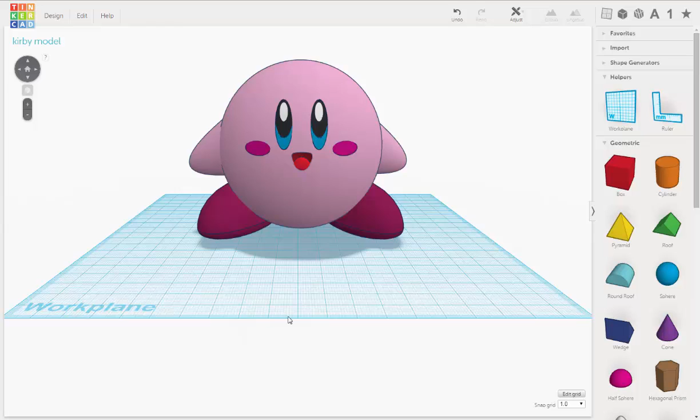Okay, so the first thing is, just by looking at him, we go to the corner here and we can see how big he is. He's basically 82 by 82, so 82 millimeters. So he's on the big side for a 3D printed model.

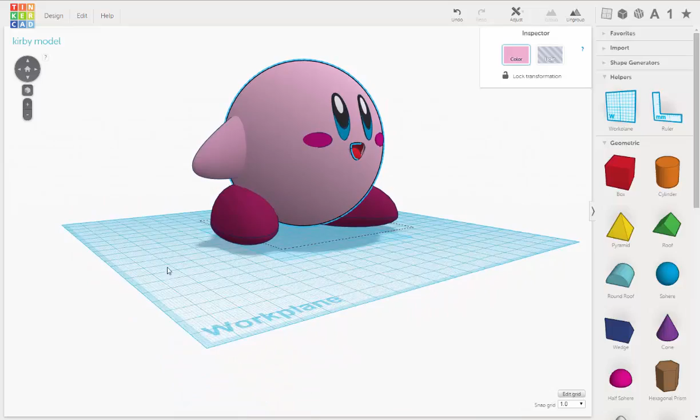On top of that, right now he is essentially solid, not hollow. One of the things I do to keep the cost of making these models and characters down is you hollow them out so that you don't have to pay for all that material, and that can really bring the cost down.

Another thing you can do is shrink him down to a smaller size, which can also have a big effect — again, less material.

One of the things you should do first is set up an account at shapeways.com, which is really easy and completely free. If you're on the younger side, you need to ask your parents, but again, it's completely free.

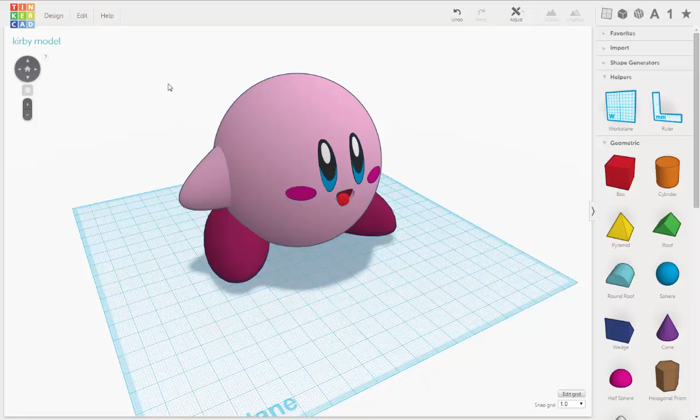So we go up to Design, go down to Order a 3D Print. Just click on that — it's super easy. This pops up, and here are 4 different 3D printing services.

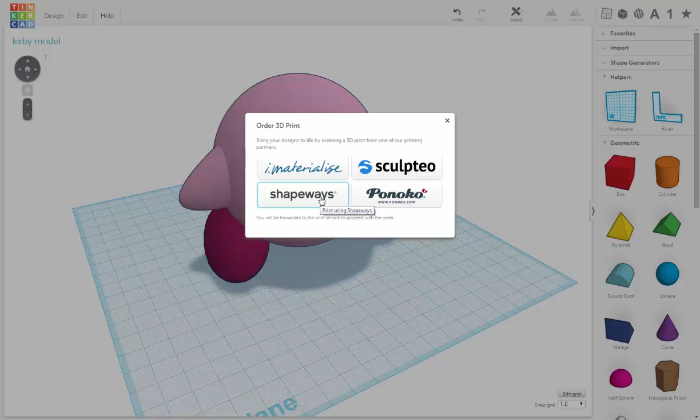I've used Shapeways and Sculpteo, and they're both very good. Shapeways tends to have a bigger selection with metals, but since we don't have to worry about that, we're just going to be printing a color character. I haven't tried i.materialise or Ponoko, so anyway, click on Shapeways.

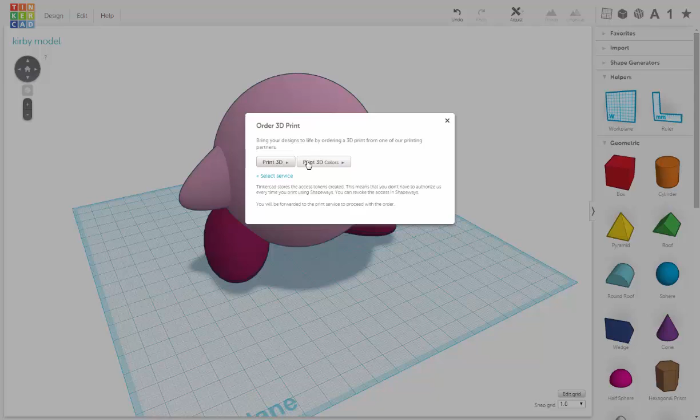Here it says Order 3D Print. If you're printing something you want to paint yourself, you just click Print 3D, and they would print it in a white material — or you could pick a different color material. But he has color, so we want his color to come through, so we click on Print 3D Colors.

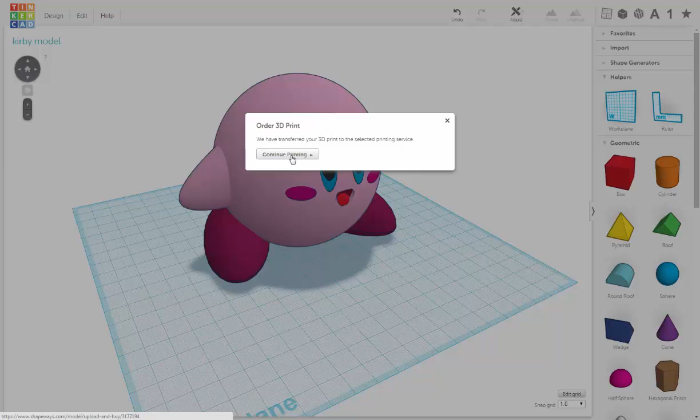So they've transferred it, now we want to continue to print. If you're all logged in and signed in, if you click this, it'll probably ask for your username and password to log you in, and it'll remember that, which is very convenient. I've already done that.

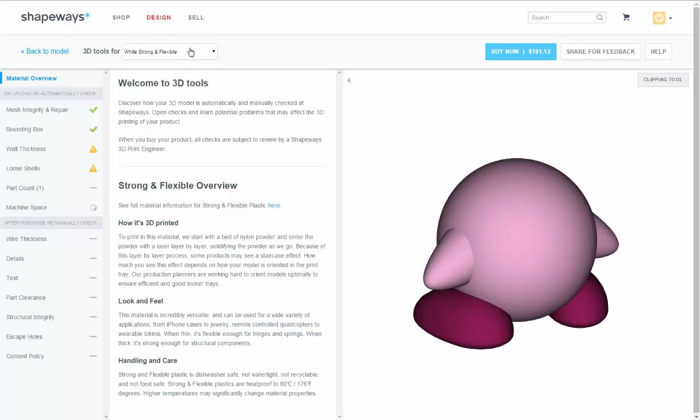Give you an example, if we go up here to, let's say, the white plastic, we want to see what's the issue. Say if we were going to print it in white. So we can click on that, and up comes their 3D tools. This is specifically for white, strong, and flexible. So on the side here, in the overview, a green check means it passed. This means there's an issue. All right, loose shells and wall thickness. To see exactly what that is, you click on it.

So it's saying wall thickness guidelines. Now if you look over here, here's the model, you can look around it, and green equals safe. This legend here will explain everything. Green equals safe, yellow is suspect, and blue means it's been fixed.

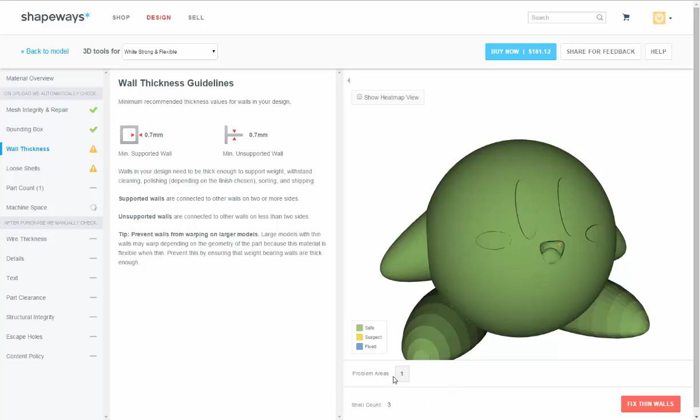So in order to see that, if you can't see it directly, you can click on the number and it'll zoom into the problem area. All right, here we go, right here. So you can have this problem with the sandstone too. What it's saying is it's suspect, meaning it might be a little thin there.

And if you look over here, you have your minimum supported wall thickness, 0.7 millimeters. So anything under that, it's worried that it won't be strong enough and it could fall apart or break.

What I'm thinking this might be is the mouthpiece that we inserted to create the darker background color, that was very thin and it wasn't fitting exactly inside the mouth. So one of the options you can do is go back into your Tinkercad file and kind of pull his mouth into an area, keep pulling it in so it's as close to the wall behind it as possible, so there's no space, and then it won't think of it as being a thin space behind there. It'll think it's one solid piece.

And an even quicker way to deal with it would be just to delete this mouthpiece, background mouthpiece, if it's too difficult and you're having a hard time.

I know sometimes the tongue felt like it was too thin. So if your tongue looks too thin, you just need to select it back in your Tinkercad model and thicken it up a little bit.

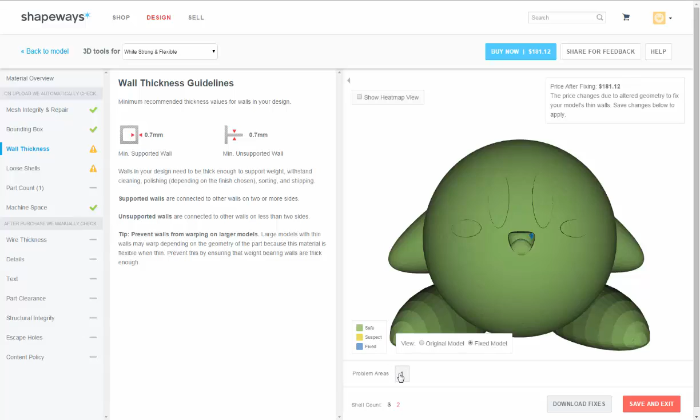Okay, so it fixed it. Let's see what it did. All right, that's not terrible. I've seen it do a lot worse. So you could do that. If it's pretty small like that, that's probably doable.

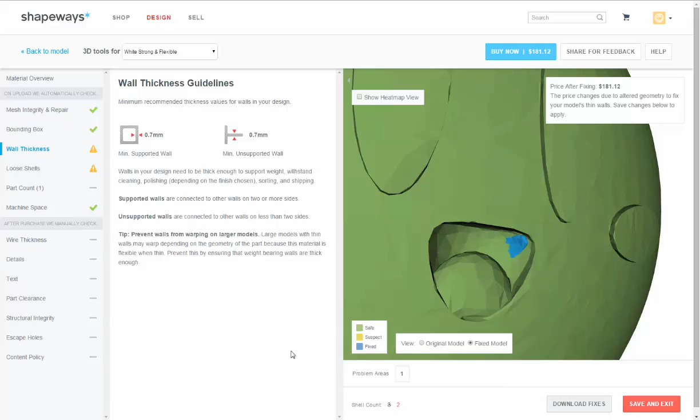Anyway, after it fixes it, you can take a look to see if you like it, and you can go back and forth. You can view the original model, click back to the fixed, and if you don't like it, you don't need to keep it. So you can either download the fixes, and if you like them, you can save and exit, or you can just go back.

So, loose shells, I'm going to click on that, see what that means. I've seen this problem before. Remember when we created the feet, we took the two eggs, cut them in half, squashed them, and then put them together.

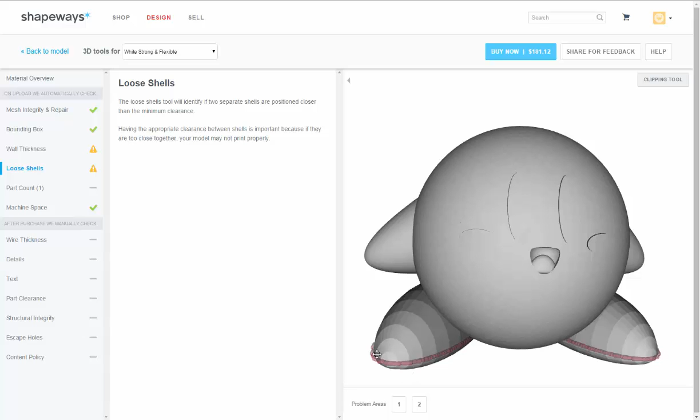Now, we didn't get them close enough together. They probably needed to overlap each other a little bit, so we needed to push them down into each other a little more. And it's picking up this teeny little bit of space, and it thinks it's not one piece, so it needs to be welded, and this is what it wants to do. It wants to weld it this way. You do not want that.

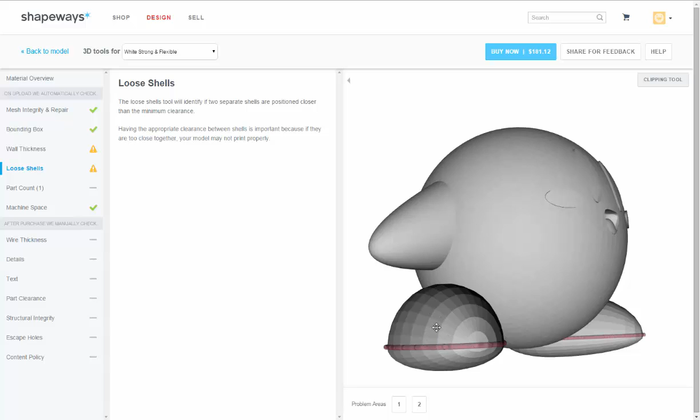So anyway, these are some of the things you might be getting with your model in the sandstone. So a fix for that would be to go back into Tinkercad, ungroup these so that they're two separate pieces, and take the top and just push it down just a little bit, like a couple of millimeters. Then you can take it back into Shapeways, and it should be fixed, because that's how I've fixed stuff in the past when this happens.

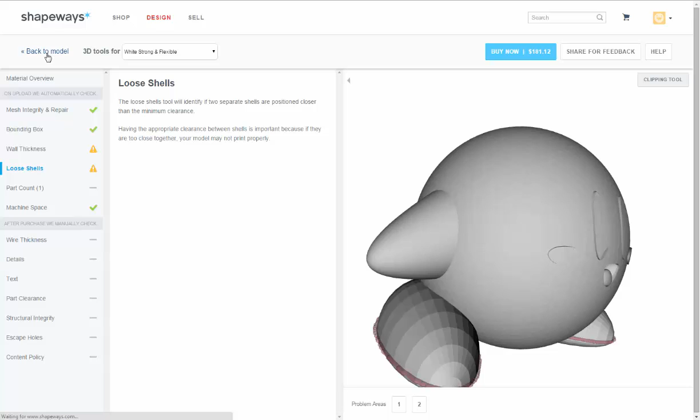All right, so let's go back to model. It's up here in the left corner. Okay, we're going to go back down to sandstone.

The other thing I want to say, the main obvious reason why we don't want to keep going further, even though this passed sandstone, is $264. Not interested in paying that amount of money for a little toy. So we can definitely fix that. We can go back, hollow him out, and shrink him down quite a bit. That's what we're going to do next.

All right, so in the next lesson, we'll make these fixes.